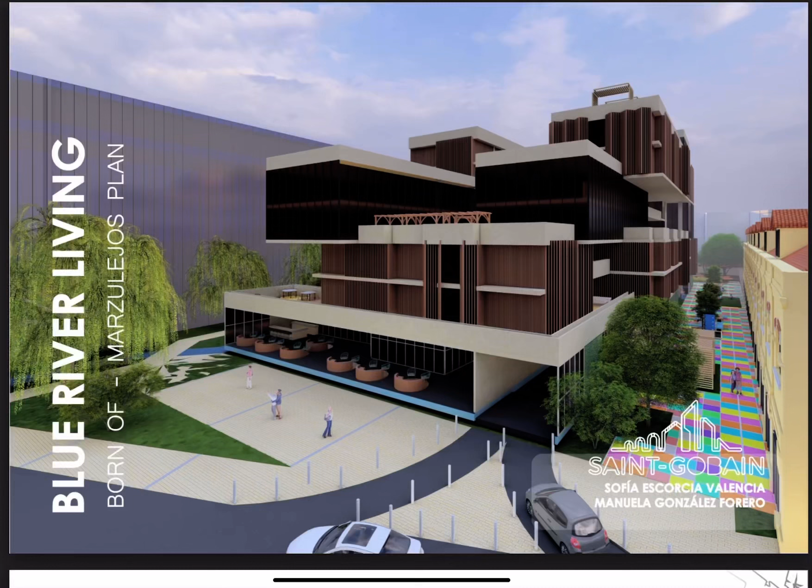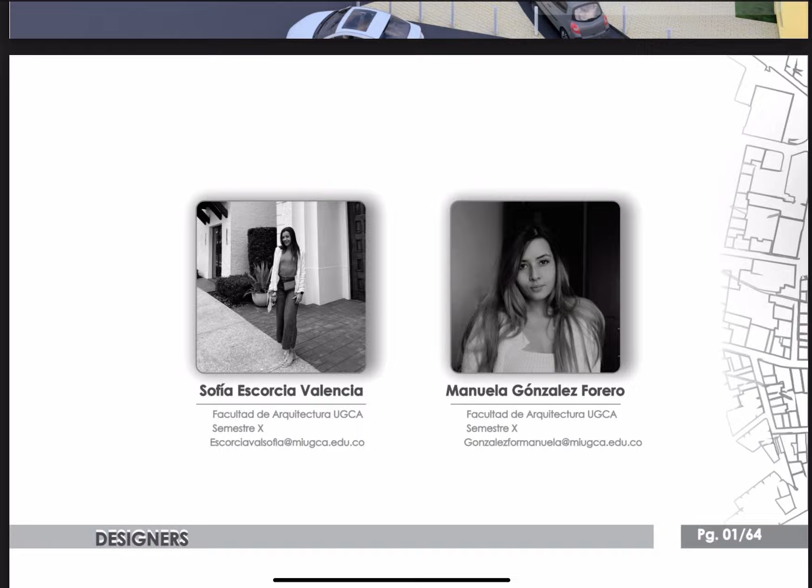This is Blue River Living, born of Marzulejos Master Plan, the proposal that we made for the Saint-Gobain Architecture Setting Contest Edition 2023. The designers are Sofia and Manuela from the tenth semester of the Faculty of Architecture of the Universidad La Gran Colombia.

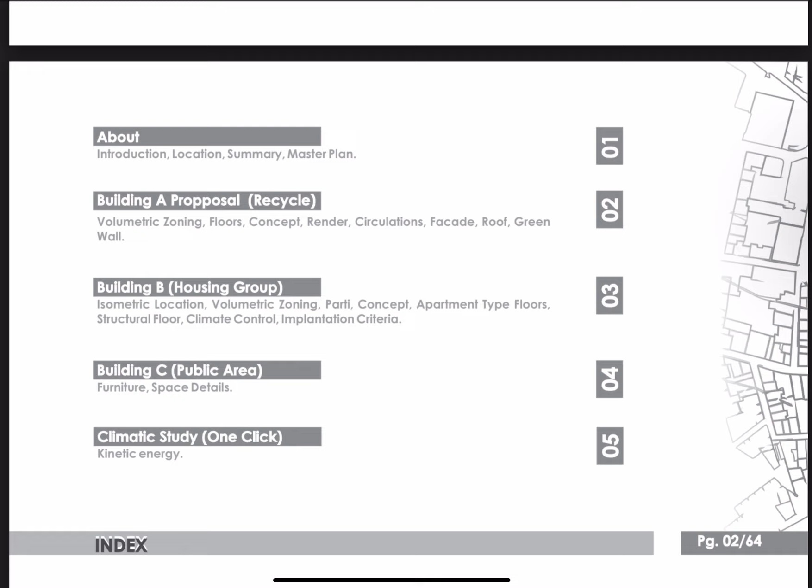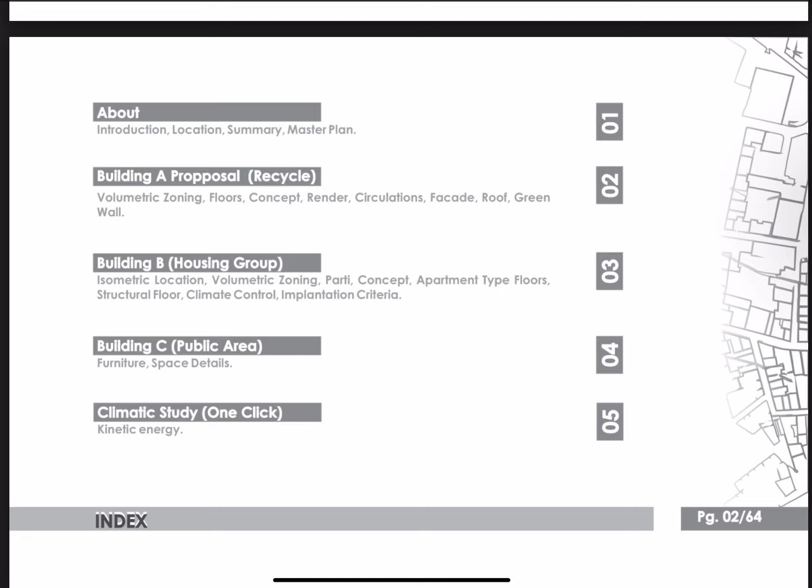The order that we will be following today is 5 chapters. The first is about the project. The second one is Building A, the proposal of the recycled building. The third is Building B. The fourth is Building C. And the fifth, the last one, is the climatic study.

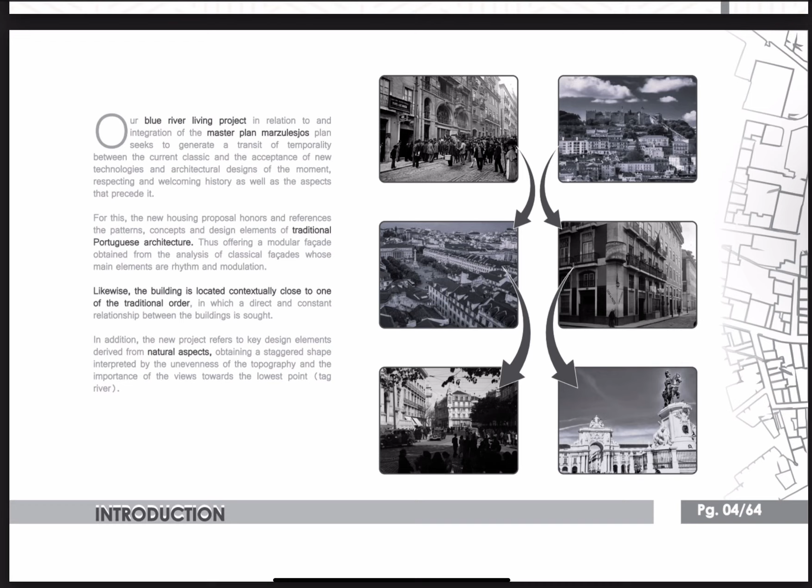The first thing is the about section. Now we start with the first chapter where we have an introductory part. What is most important for us is to review the history of Lisbon and traditional Portuguese architecture for the development of the proposal, taking the classic concept of architecture and assimilating it in a more modern way.

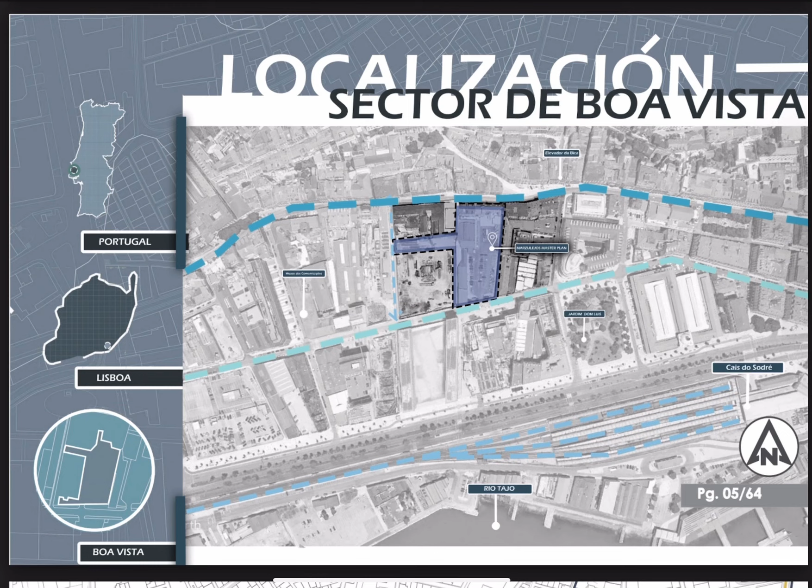Then we have the location, where we are located at Lisbon, Portugal, in the Boa Vista sector, close to the Elevador da Bica, Jardim Dom Luis, and the Tagus River.

Subsequently, we have the summary of the analysis carried out in 4 aspects: the physical one, the road systems, the environmental, and the architectural component, where it was defined that we are in a strategic location due to the ease of accessibility by the systems available, such as metro, train, etc.

In the same way, it is observed that in the sector the uses are varied, where housing and commerce predominate, having the possibility of potentiating them.

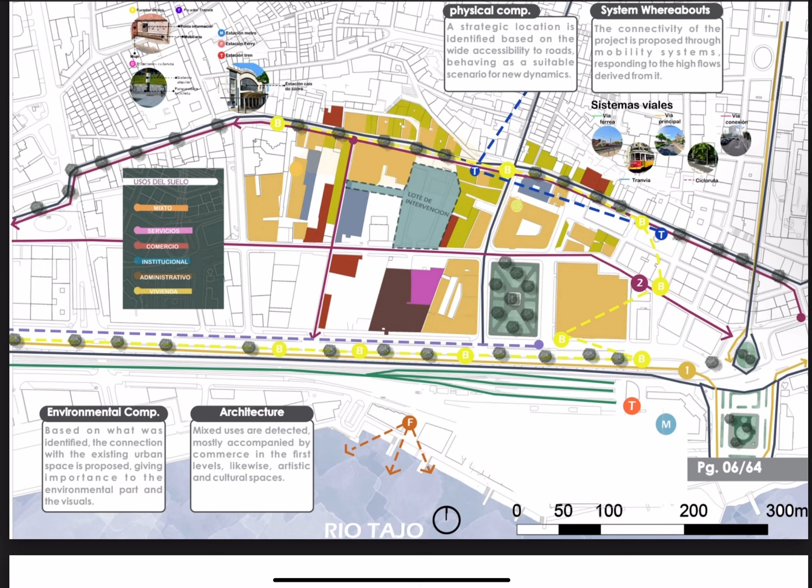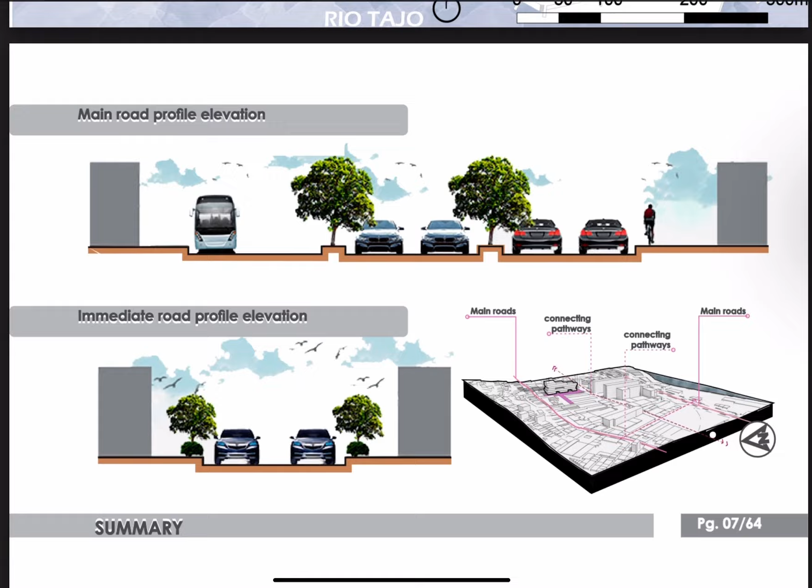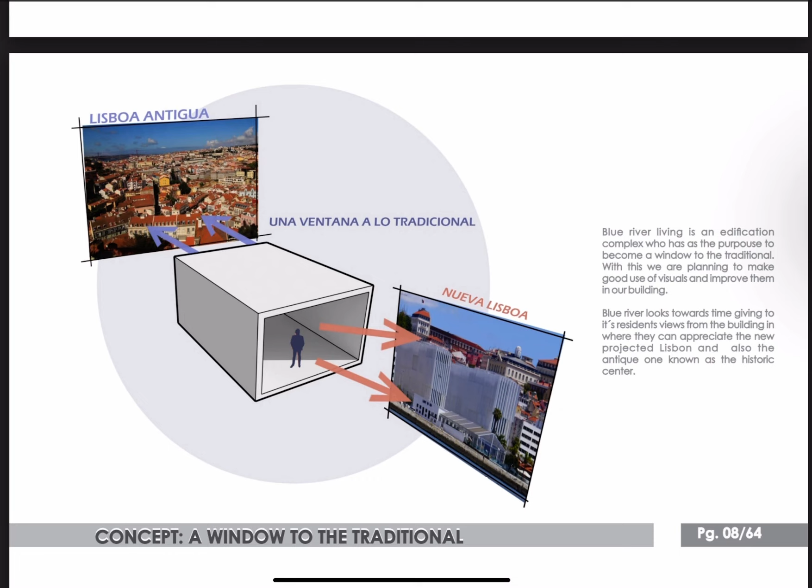Here we start with our concept, which is a window to the traditional, where we see that Blue River Living becomes an icon that offers views towards the historical part of Lisbon, as well as towards the modern plans from its gaps, also providing a predominant view towards the Tagus River.

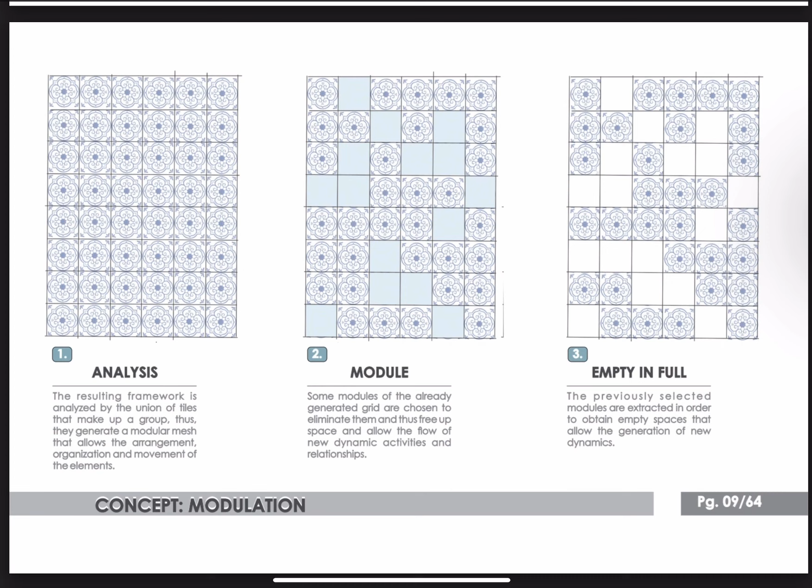The other concept applied in this case is modulation. This is applied in 3 stages: after generating a modulation with the proposed mesh, certain points are finally selected, then we pass to stage number 3, the empty in full, where we select mesh areas that are eliminated to generate voids, proposing new dynamics and giving new visuals on the building.

This is our master plan, called Marzulejos, where we have the requirements of the contest.

This is Building A, a recycled building. We have determined spaces for the new Film Commission of Lisbon.

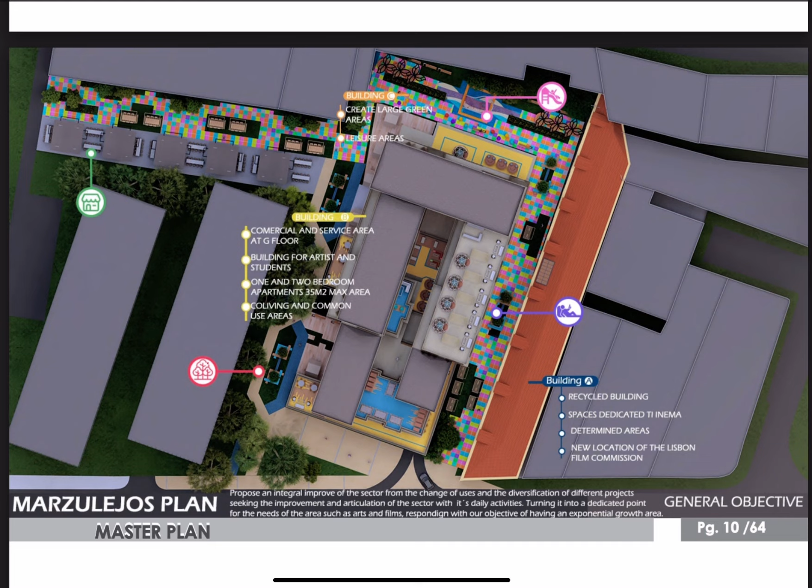Then we have Building B, which is going to be a totally new building, with the ground floor including commerce and services, and apartments in the upper floors. We then have Building C, where we develop the public space with large green and rest areas.

So our second chapter is about Building A, which is the Lisbon Video Library. Then we have the zoning, where we have the film exhibition and coffee area that are supposed to be on the first floor. On the second floor, we have the warehouse, the viewing and audiovisual area, and on the third floor, we have the administrative area.

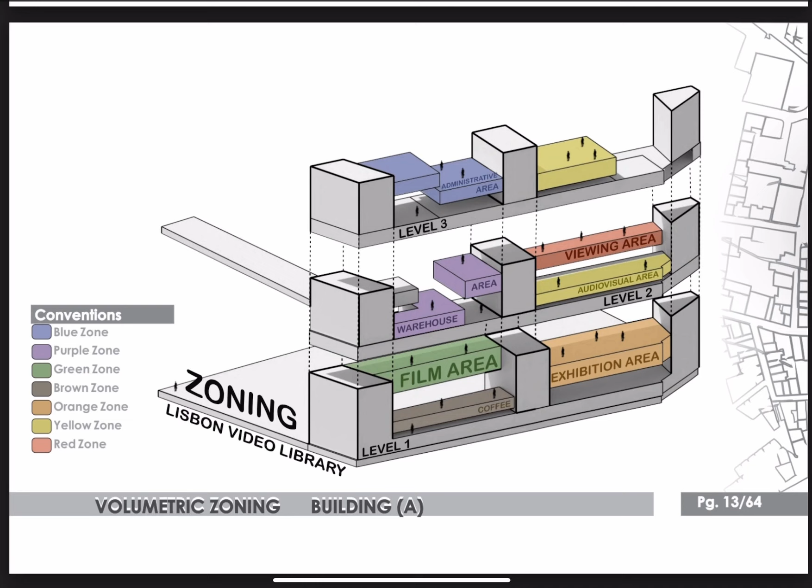For this proposal, it was important to preserve the circulation, fixed points, and bathrooms. There are two fixed points: one private and the other public.

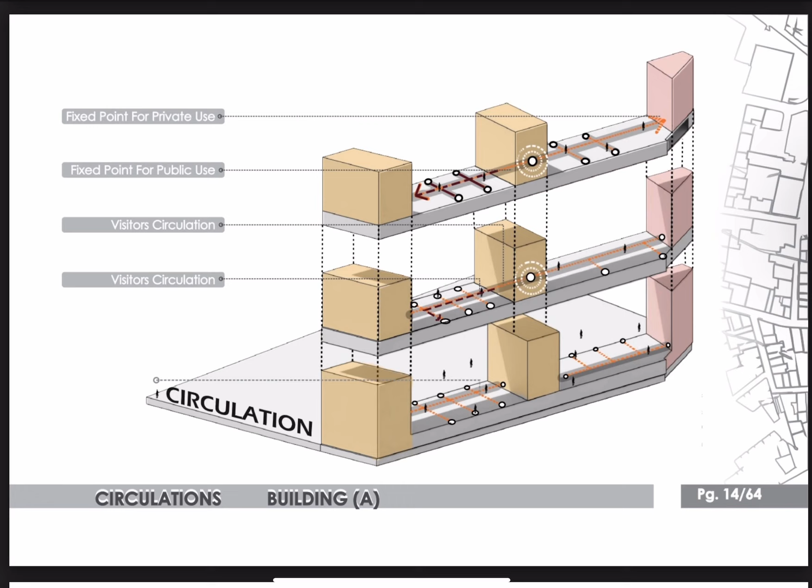This is our proposal of floors, where above we have the current floor and below we have the preliminary proposal. On this floor, there are areas such as exhibition rooms, stores, and digital rooms.

On the second floor, we have the visionary room, auditorium, sound studio, etc. And on the third floor, we have the storage, food room, roof, and restoration room.

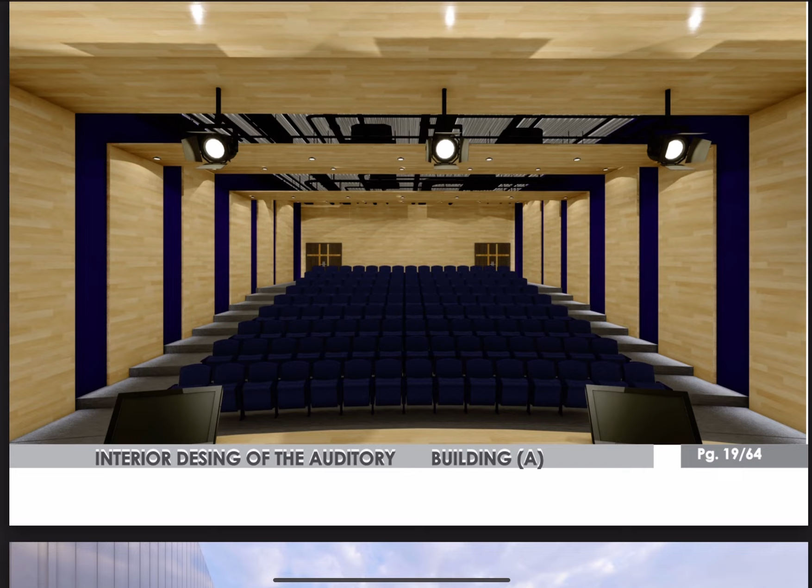Now we have our chapter 3, which is about Building B. Blue River Living is a new housing building for artists and students.

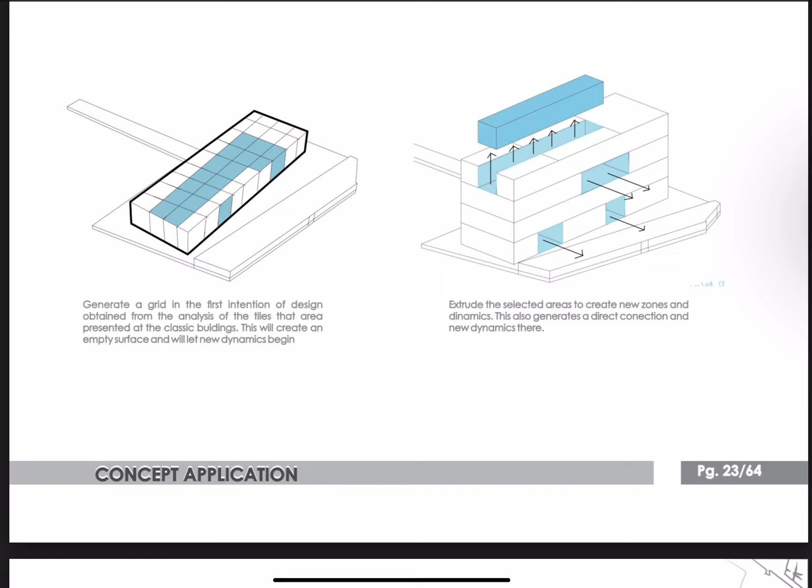Here we can see the design process, where initially we have a solid parallelepiped, which is later extruded and divided, then we select spaces that will be empty.

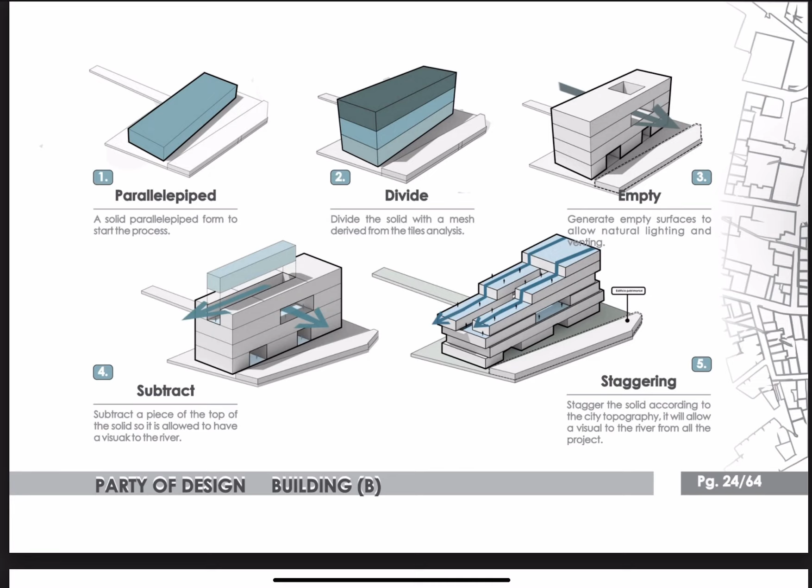In step number 4, we subtract these parts of the volume, and in our final step, we generate a staggering to assimilate the volume from the topography of the place.

These are our implantation criteria, where we have the topography and the visuals, where the shape is staggered according to the topography of the city.

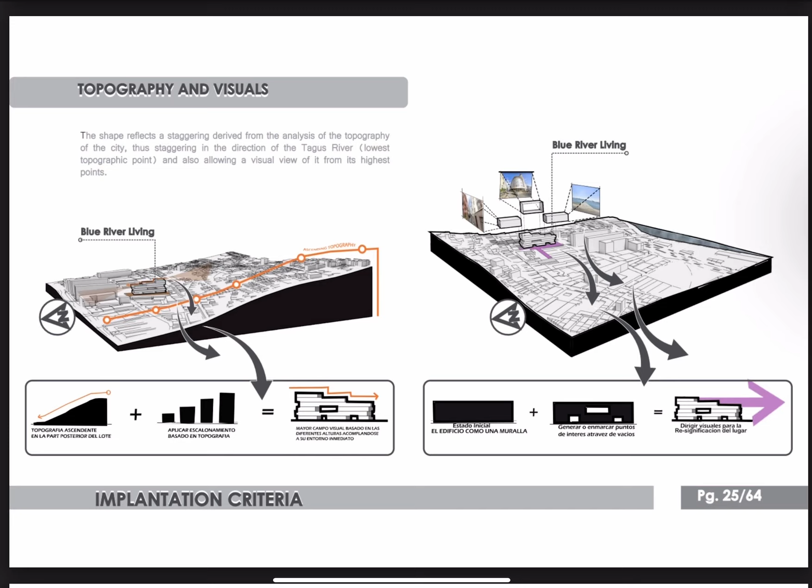So we can see how it is reduced until it reaches the lowest point that will be the place of the intervention. Likewise, the visuals in the implementation are important because the main concept of the building is to have the best use. This is accompanied by the fact that the staggering allows us to have a very visual feel.

Then we have an important design criterion, that is the use of color, where we analyze the tones of the classic Lisbon facades to place them on our new facades. And also we analyze the user so we can have the usage of color.

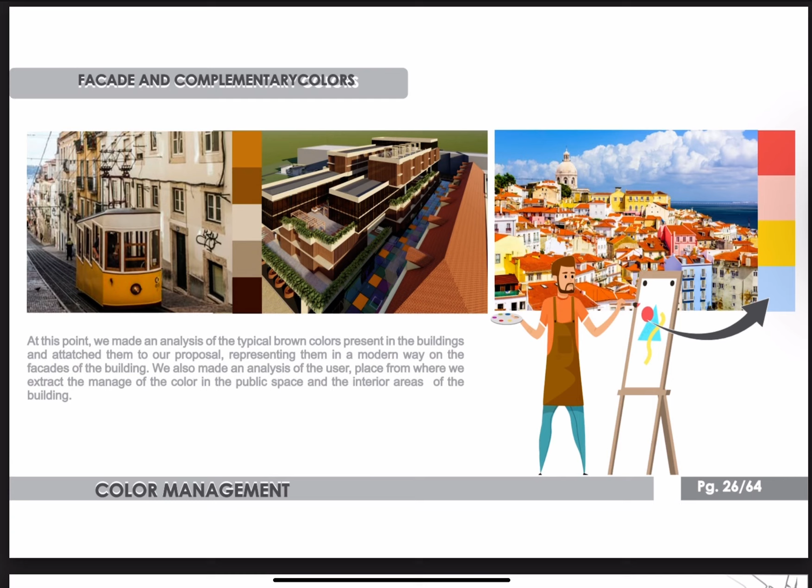This is the preliminary proposal for type floor one and two, that is going to be at the left. We have apartments of 1 and 2 bedrooms. Also, we have social areas and yoga spaces.

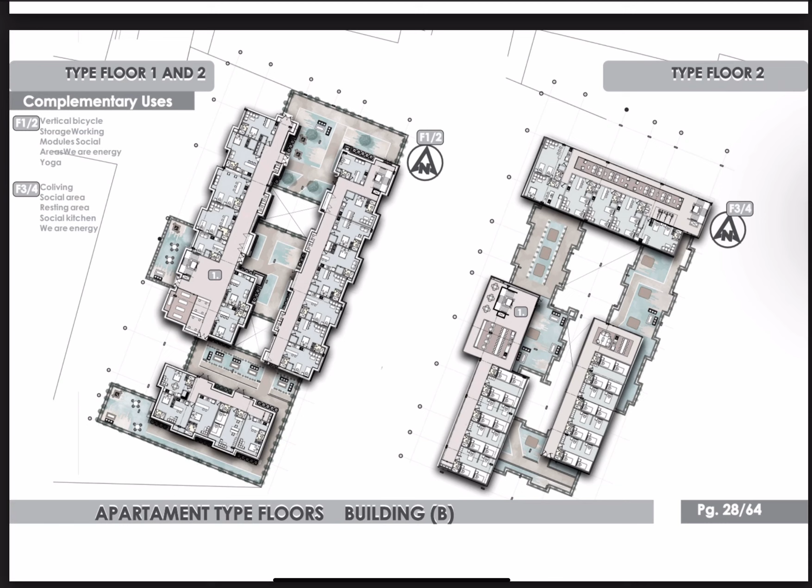We have the second type floor that is going to be located at floors 3 and 4, where we have the co-living houses. We have apartments with a capacity of 8 people. We also have social areas such as kitchens and bathrooms.

We have here the proposal for the 5th and 6th floor at the left part, where we have one similar to the first and second one. We have apartments of 1 and 2 bedrooms. We have reading areas and social areas.

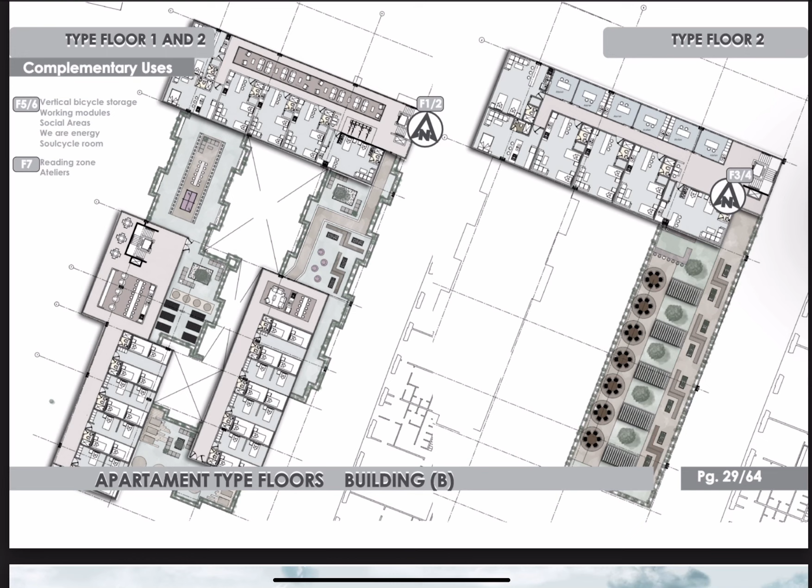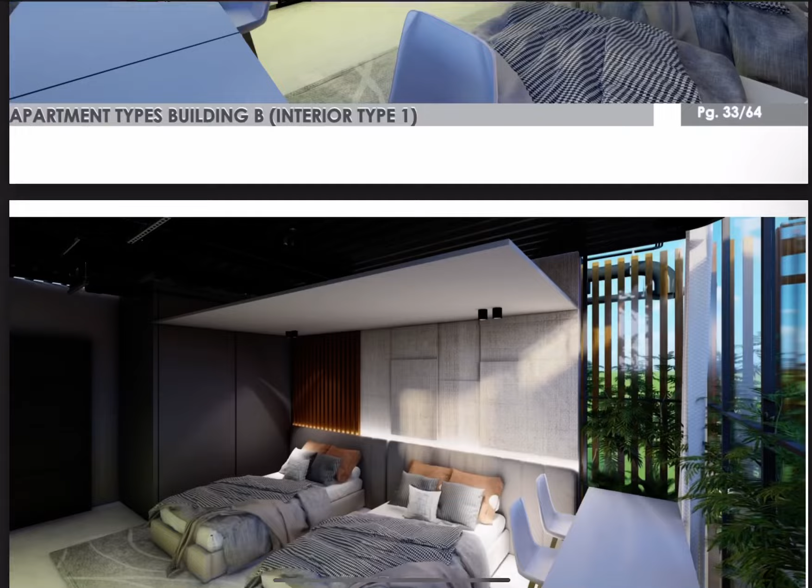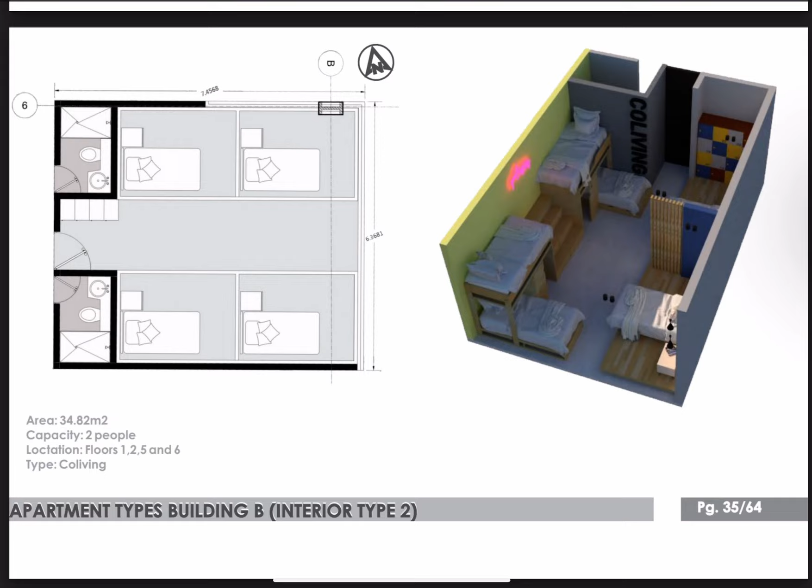This is the second kind of apartment. It's going to be a co-living. It has a capacity for 8 people, and it has an area of 35 square meters. We have social areas such as kitchens and bathrooms. This is the project view of the interior of this apartment.

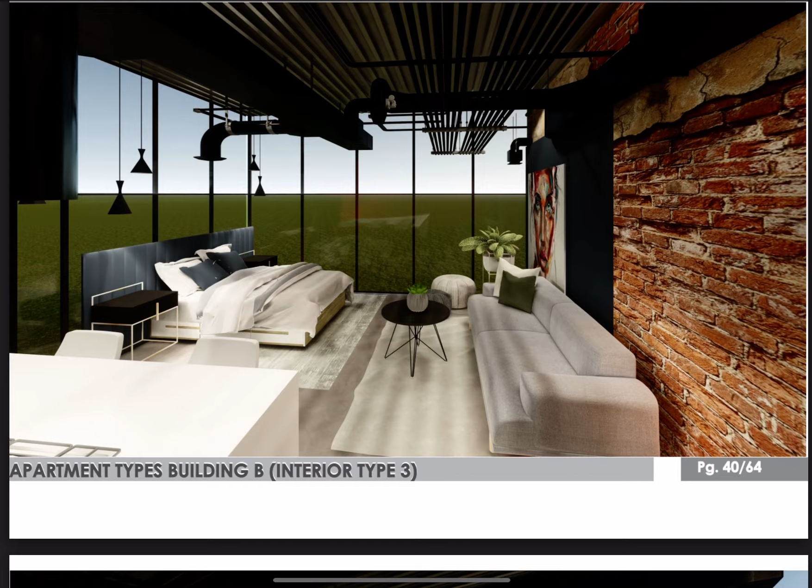Here we have the last proposal of apartments. It is just for one person, so we have 1 bedroom, one bathroom, 1 living room, a kitchen, and a storage room. This will be the project view.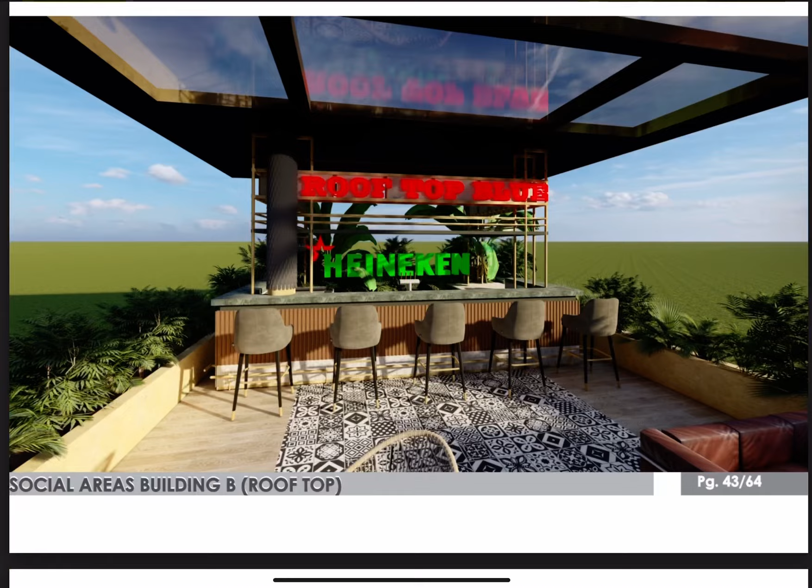We have here the social areas in the towers that we have, signified by color. Those are the working spaces. And here we have the rooftop of the building.

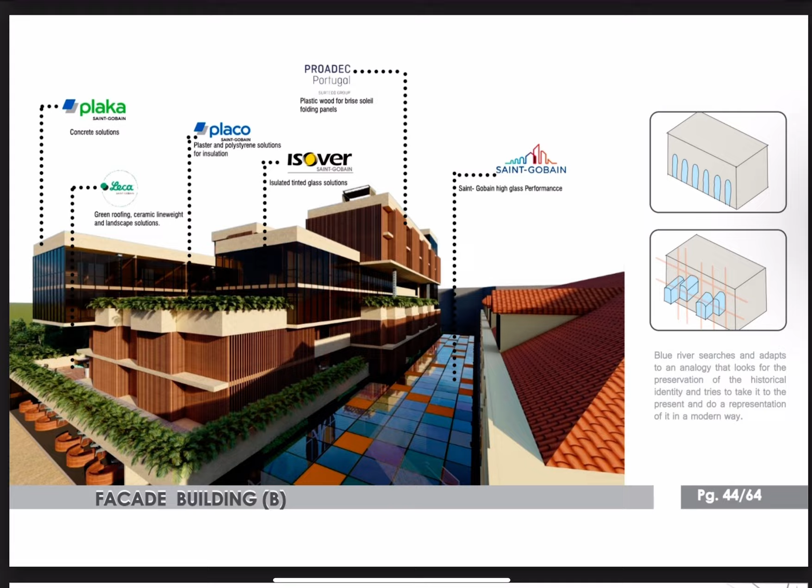The use of materials on this facade is carried out with Saint Gobain suppliers, looking for sustainable materials that have the highest efficiency and allow the use of sunlight. In this facade cut, you can see the behavior of the materials in the details, where there are folding panels to allow or not the entry of the sun according to the time of year.

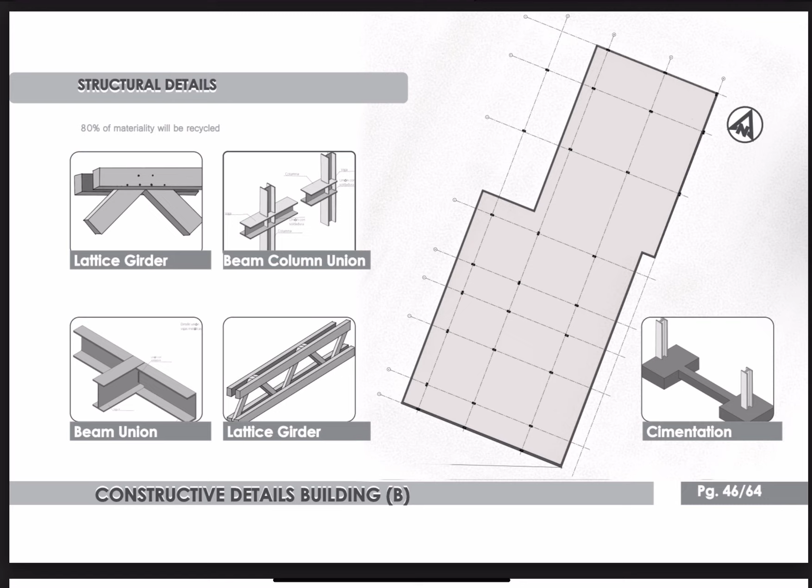The structure part, we have a metallic structure that contributes to the sustainability of the building. This is a metallic structure that has 80% of it made of recycled material. We can also see the details that we have here.

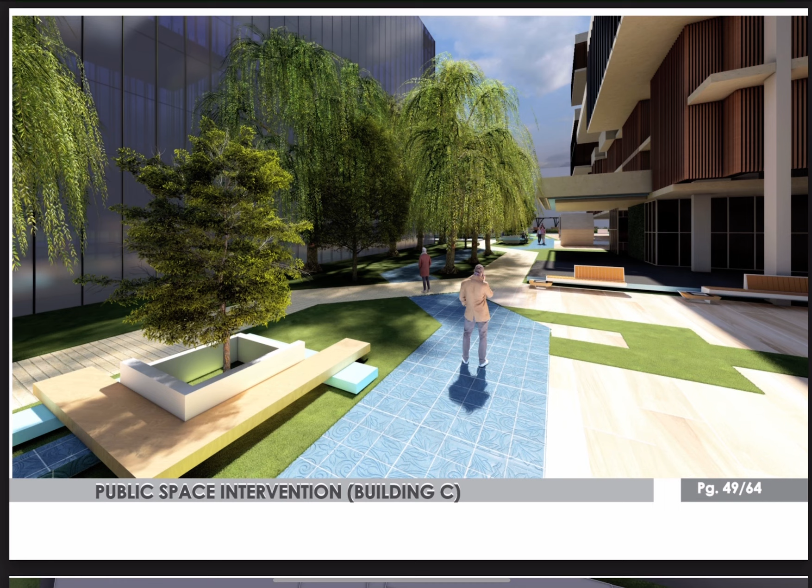The first chapter is going to be about building C, that corresponds to the development of the public space complementary to the buildings. This is the general plan of the public space.

For the development of the public space, it was important to take into account spaces for roads accompanied by green areas, commercial modules, and sharing and integration areas.

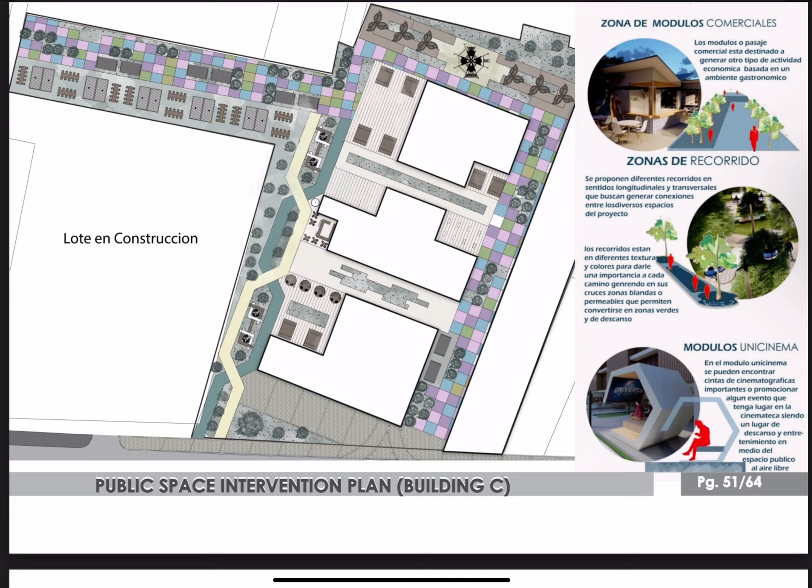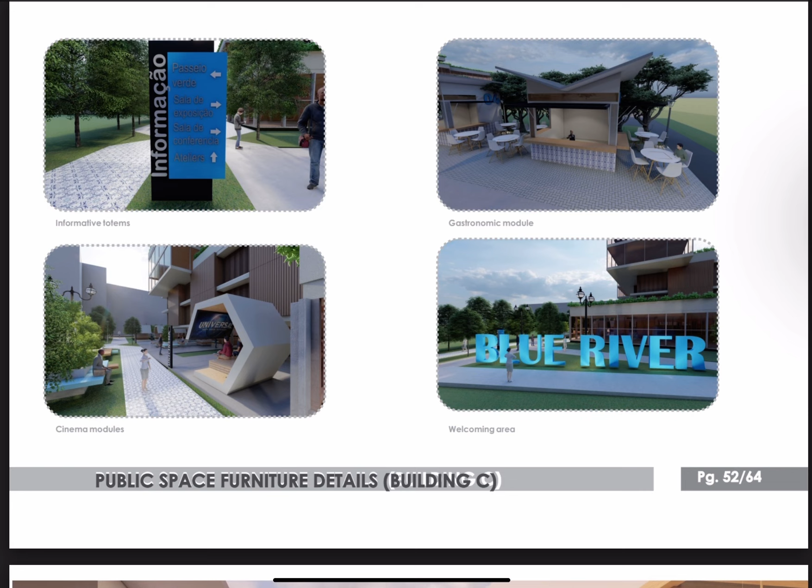These are some details of what can be found in the public space. The furniture is designed focused on the users and their dynamics. Then we can see a projection of how the gastronomic corridor will work and will look.

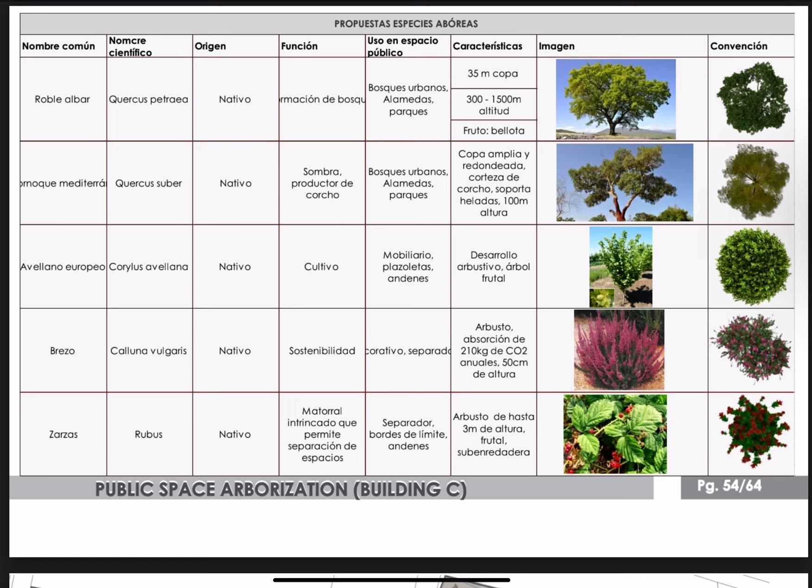Then there is a proposal for trees for the space. There are native European species that generate sustainability for the city. We have species such as the European hazelnut and oak, and this is accompanied by this tree location plan.

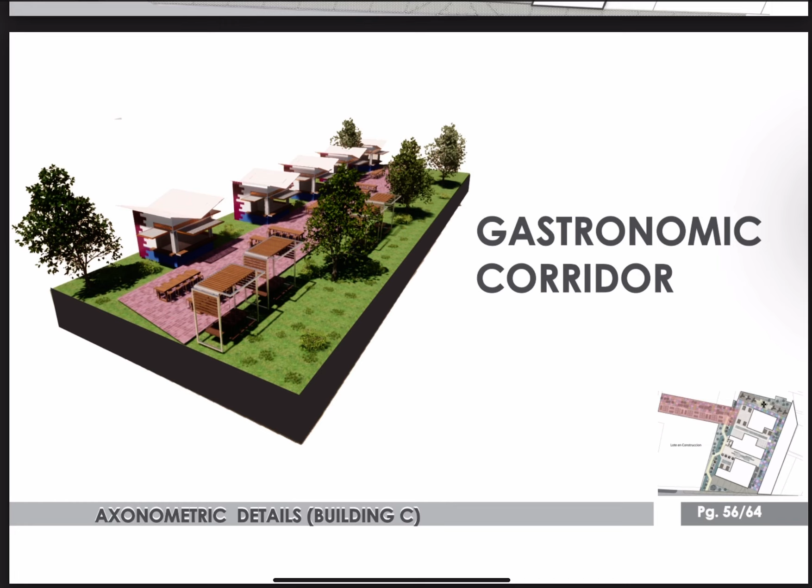We also find the axonometric of the project. This one is the gastronomic corridor.

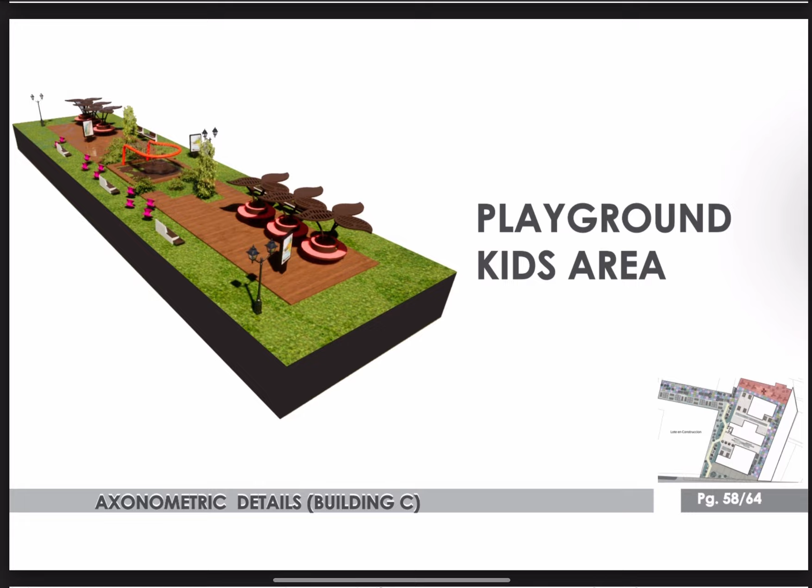Here we have the materiality of the public space, where it was important for us to seek low impact, safe, and some recycled materials for the development of the proposal.

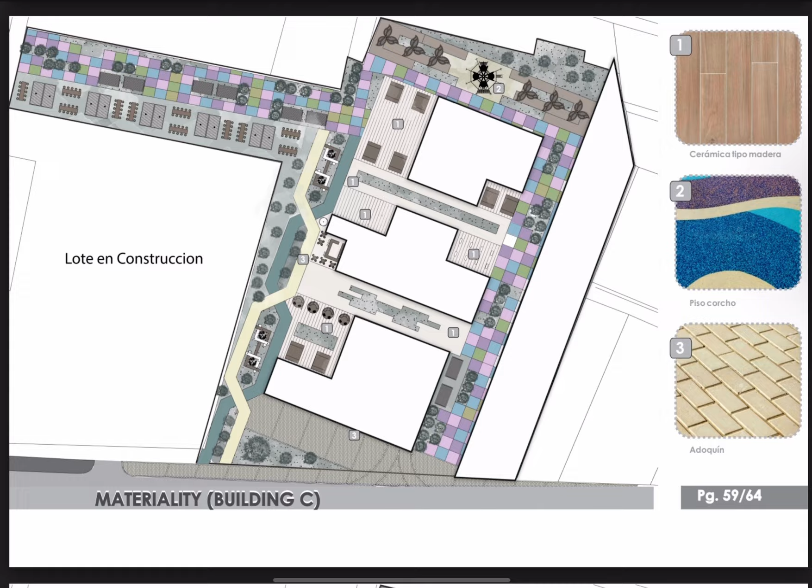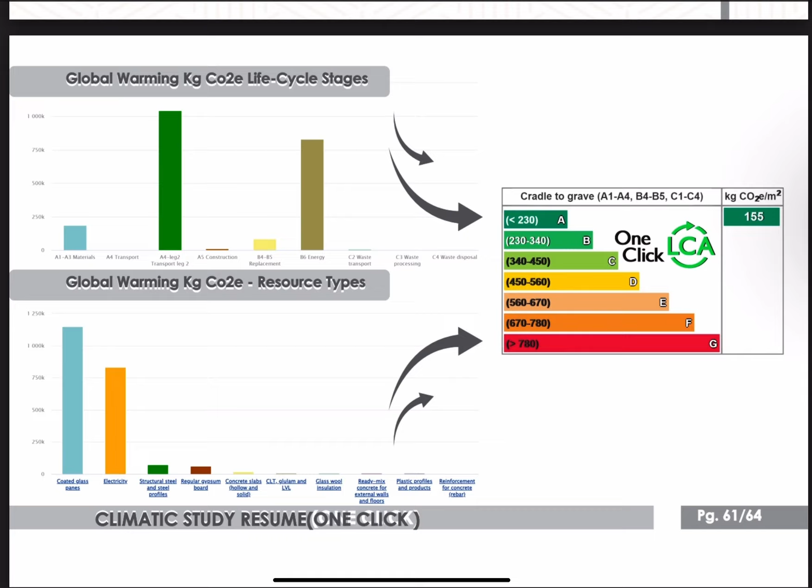Now we have reached our final chapter, which is the climatic study, where we determined according to the One Click LCA platform that we have a pilot consumption of 155 kilos of CO2 per square meter in the cradle to grave stage.

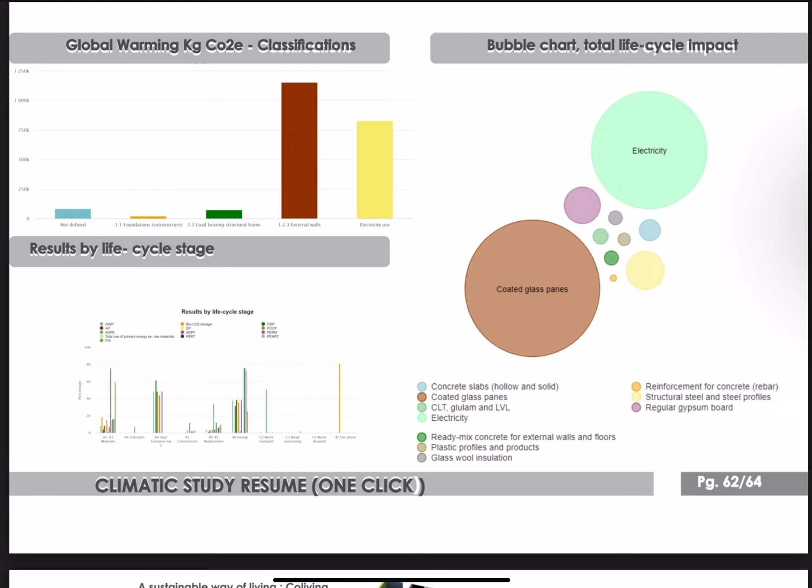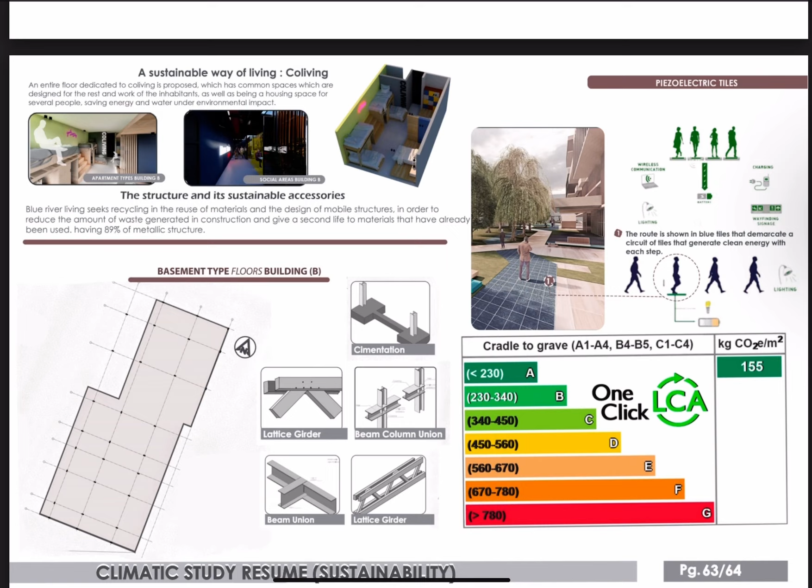And in terms of sustainability, we have a sustainable model of living known as co-living in social sustainability. On the part of environmental sustainability, we implement various native species of the area and the use of low impact materials with some recycled components.

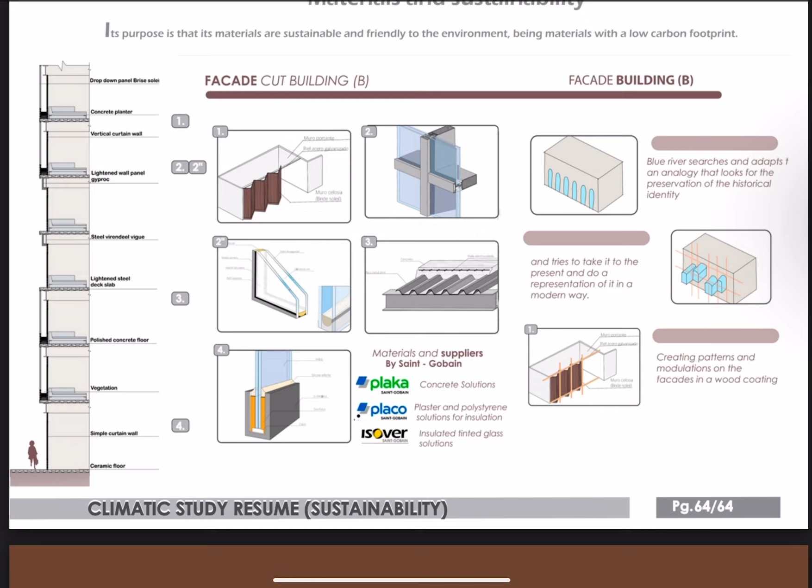We also implement piezoelectric devices useful for generating energy, and in economic sustainability, we have a rooftop in building B from which the income will be used to sustain the building.

This is all the information that we have at this time to provide you about our project that we made and present for the Architecture Student Contest of Saint Gobain, edition 2023.